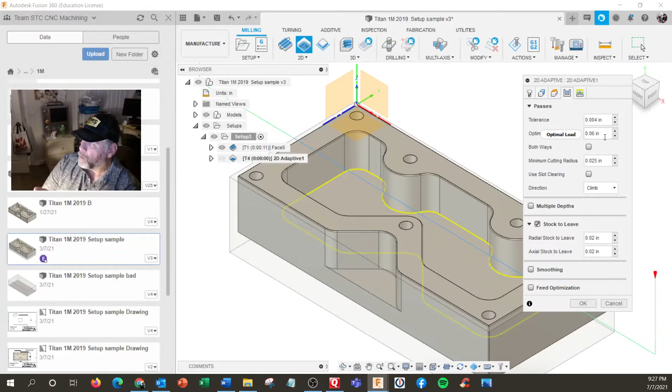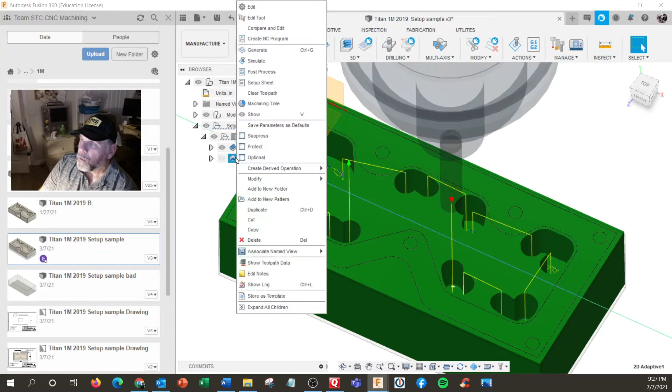So we hit that. Oh, it didn't do everywhere. Why didn't it do that? Stock contour, oh, we don't want that. Hit OK. It's jumping around, hit edit. I had the rest machining on, that's why it's kind of giving me problems.

But that tool is able to get in there and do the job, even though it's tiny. But the step overs were automatic because I didn't have to go fudge that. So it pretty much was, oops, wrong one.

I got tool, feeds and speeds are done. Geometry on 2D I had to select. No stock contour, no rest machining because it's different than 3D. Heights, I could even go like model top, select a contour, retract height.

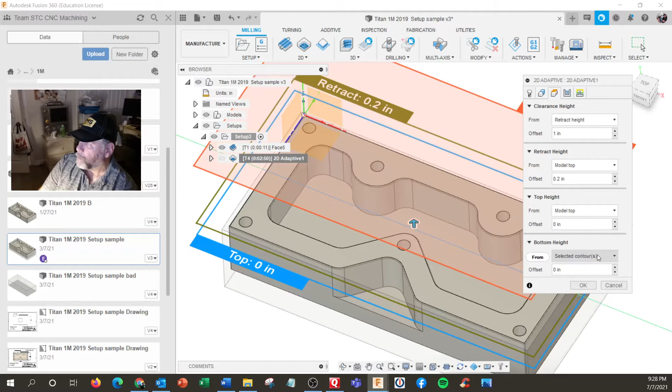Optimal load is going to be my side cut. That's already been determined, and stock to leave, side and bottom. Climb mill and stay down. And I like having these new settings in here, lift height and non-engagement feed rate. So my slowest machine will go 400 inches a minute feed rate.

So that's, Mastercam uses this, more commonly called micro lift. And if I do 70% stay down, I think a lot of people use between 50 and 70. Let's go 60. Let's try that out.

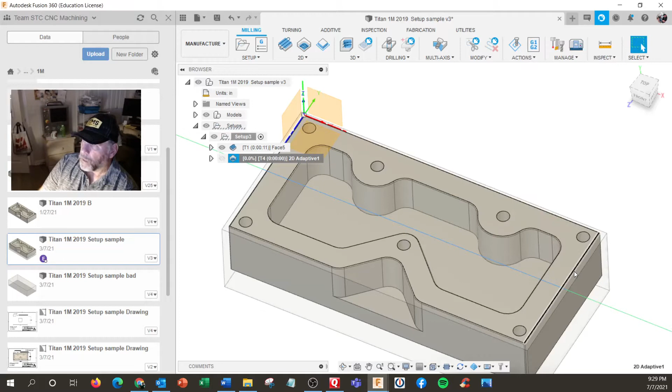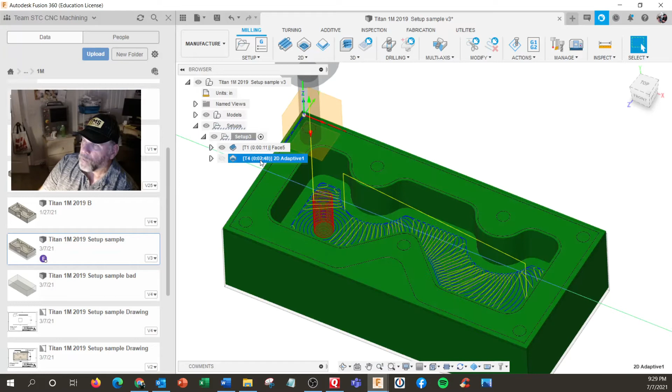And I also have this turned on for time calculation, which is in preferences, manufacture, and show operation machining time. So I could tell right off the bat if I'm making improvements or not.

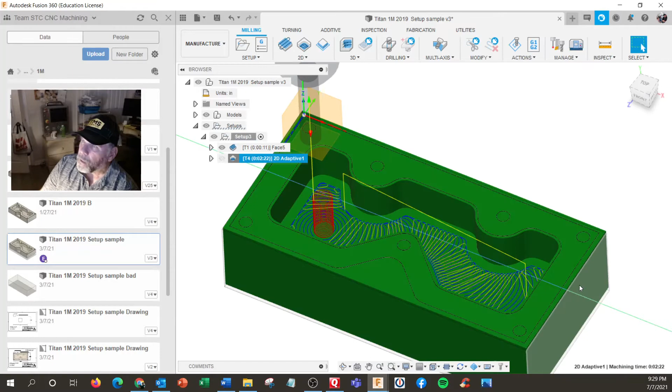Or if I thought that looked kind of wimpy, let's change this to 0.003. And it updated cutting feed rate, lead in, lead out, and ramping. So hit OK, and it saved a little bit of time.

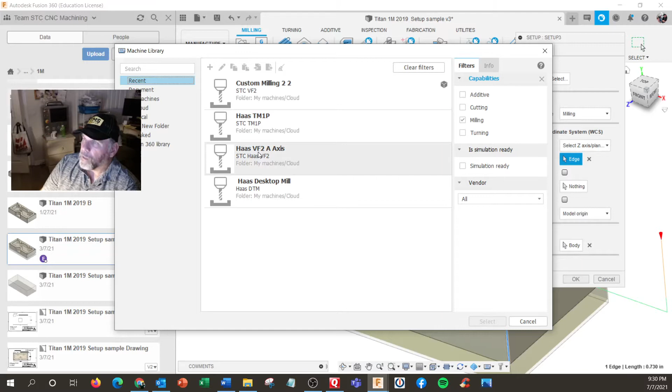Another setting on here that's also going to come into play now is machine selection. And I've started to set up machine selection. So this one I was starting to set up for total machine simulation, but if I selected, let me just pick something here. I'm actually going to pick the machine, TM1P, and I put up some parameters in here, select, and I hit OK.

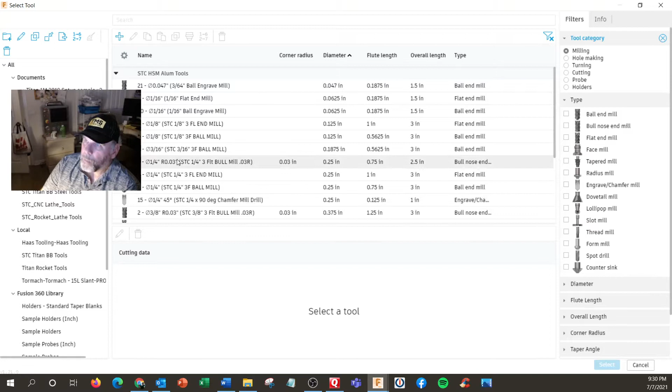Now if I went into here and I hit edit, and I selected a tool that had more RPM, I go 30%, hit select. This is 8100 RPM. Gonna regenerate. Right there, it gives you a warning: spindle speed is larger than supported for this machine. Do you want to ignore this warning? I thought this was pretty good.

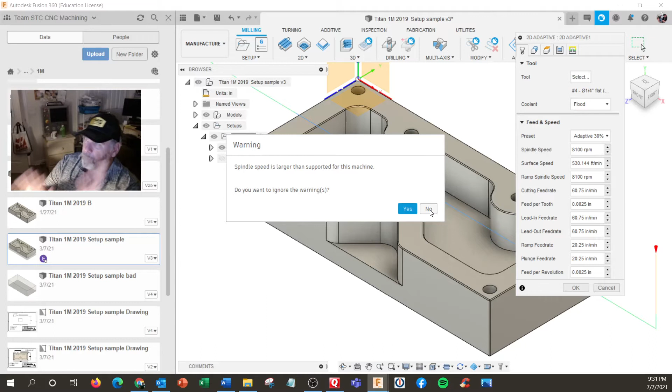I actually thought Haas should have this, that if you have an RPM in the G code and it's more than the machine can do, you should be aware of that. Because you might be moving jobs around, you got a machine shop that's got different machine RPMs. So I'm going to hit no. So that forces you, I got to do something here. I'm like, oh, I'm using tools. I either got to manually change the RPMs, but that little warning there is helpful.

So because I have in the setup tab machine selection, if I go to edit the machine, there's a lot of stuff in here. I haven't filled out a lot of it, but automatic tool changer, milling, what the maximum feed rate is. They have millimeters or inches, so if I went to inches, it's 400 inches a minute.

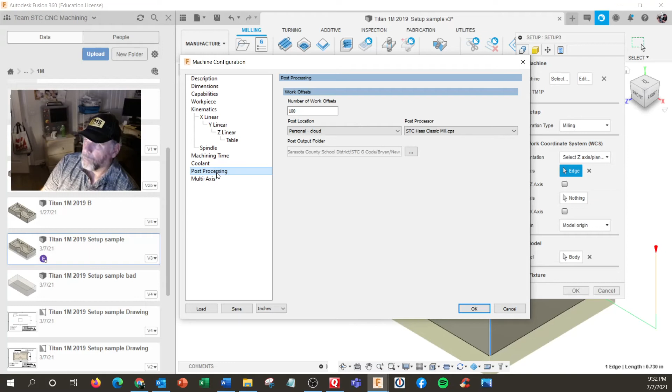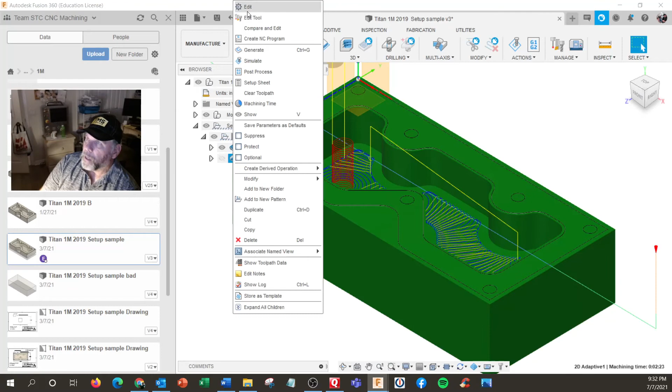So let me go back here and select a better tool. I'm going to go select. I'm going to go back into the basic aluminum library, the 3/8 end mill. I'm going to go back to 2D adaptive, hit select. Done. This is all done right now. I don't have to change anything.

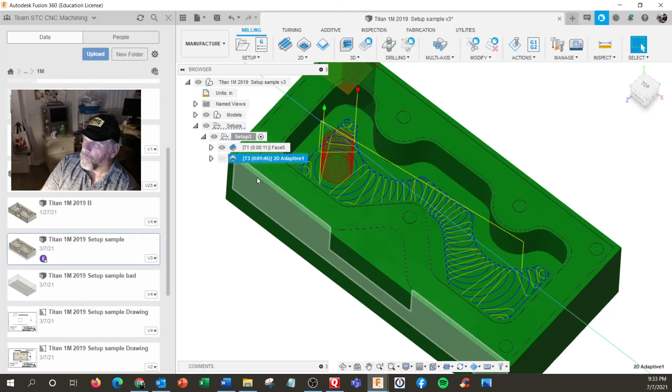Alright, so notice my step over is different. That's all in my presets. You normally used to have to go in here and change all this data and not knowing exactly what it does. Optimal load is sideways, that's 2D adaptive, and you can actually set these as a user default. Like I put in this 10,400 as a default.

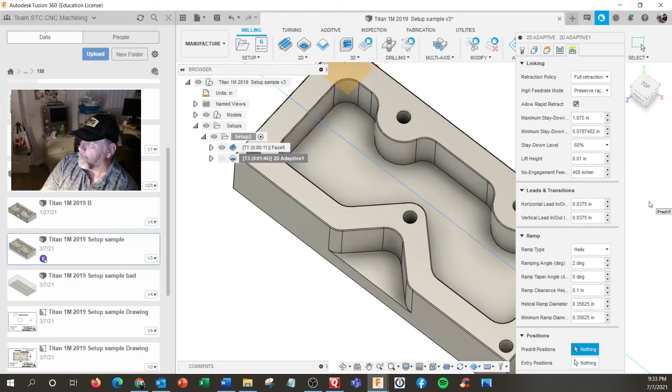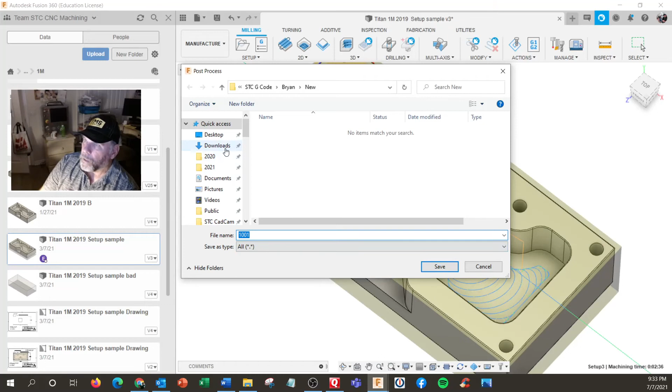So the pluses on that, let's post-process the setup. Right now, this is automatically selected. I don't have to go reselect any of that. I'm going to post. And I'm going to just put this on my desktop. Going to review the code.

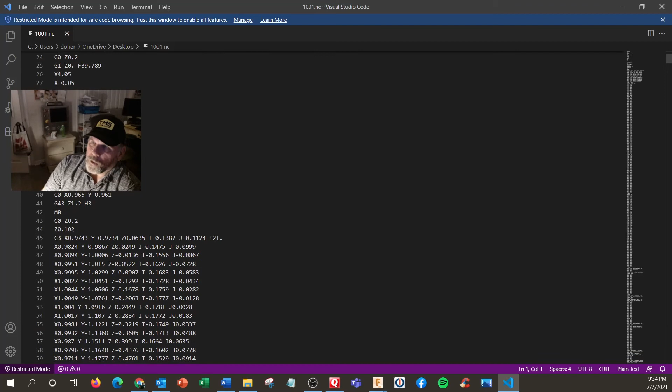Right there, I changed it to use G0 instead of G1s with the high feed rate. It actually shrinks the code a little bit, and it gives me more control when I'm running a job, if I do rapid overrides instead of having feed rates that are running real fast, so I want more control. So right here I got my tool list. I made a couple of edits so I can get all this data in here, like a timestamp. And right here, notice it puts in a 3/8 end mill because I spelled that out in my tool library. So if I'm in the middle of the program and rerunning this, I can tell what end mill it is by number or by name.

So I made some other videos on code shrinking, especially when you get into these code files that end up with a lot of data. There's a couple of ways you can do it, and one would be the smoothing parameter. This is like a smoothing on adaptive that can definitely be done. So smoothing tolerance, you could easily make this 0.003. That'll create arcs out of lines where possible.

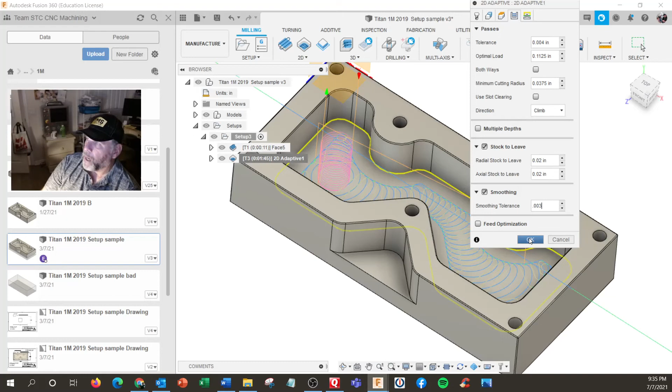What else do we have here? That's about it for there. Hit OK. And the other one would be in your post process, but you can make these all defaults. I don't use any sequence numbers. You can shut it off here. You can actually have it use sequence numbers or no, get rid of those. And I'm using the G0, yes, instead of G1 with high feed rate. And I do that more for having control at the machine. And I actually redid my post so my M8 command would come on not at the tool change level. And these machines are umbrella changes, so I don't preload the tools.

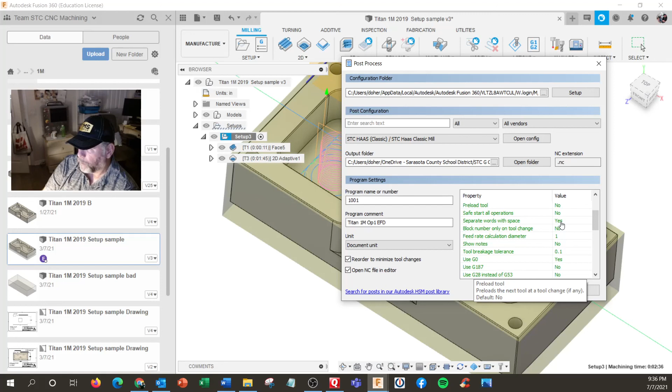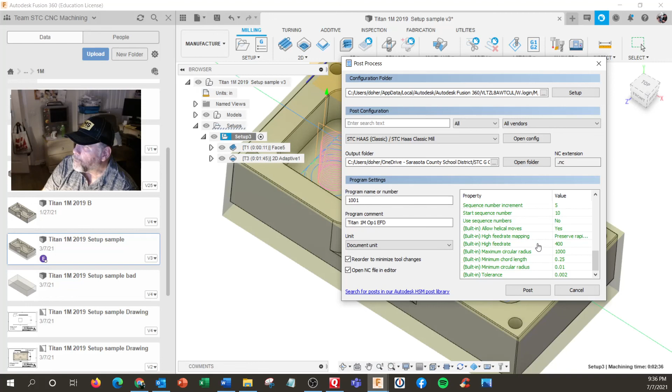Separate all words with space. If you really needed space, you could just click no on that. And we like using the G53 for the go home. And later on you get into G187s, that's also a tolerance for how close to the contour you can get. And what else we have? Allow helical moves. Yeah, so there's a lot of little settings here, but you can actually steer this through the post. I'm learning more about that.

Okay, this is longer than I intended it to be, but the Fusion Tool library settings are...